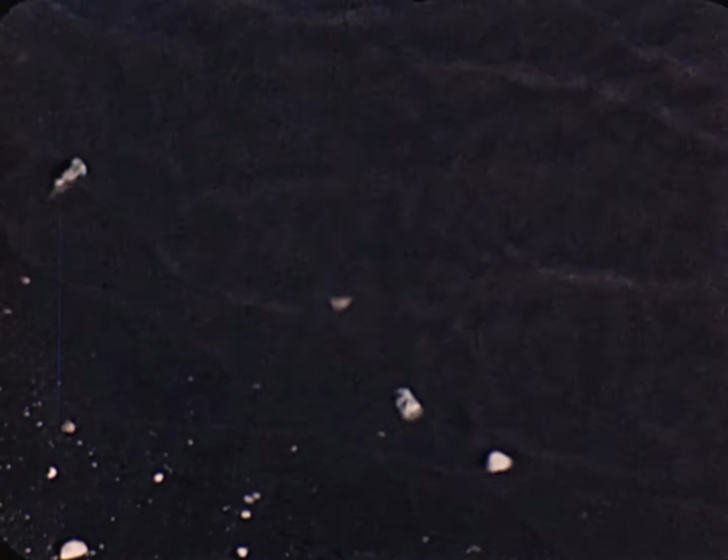In such restless waters as these, the Gulf of Mexico, lie the oil fields of tomorrow. Oil fields discovered and developed to meet the tremendous upsurge in demand for petroleum and all its many byproducts.

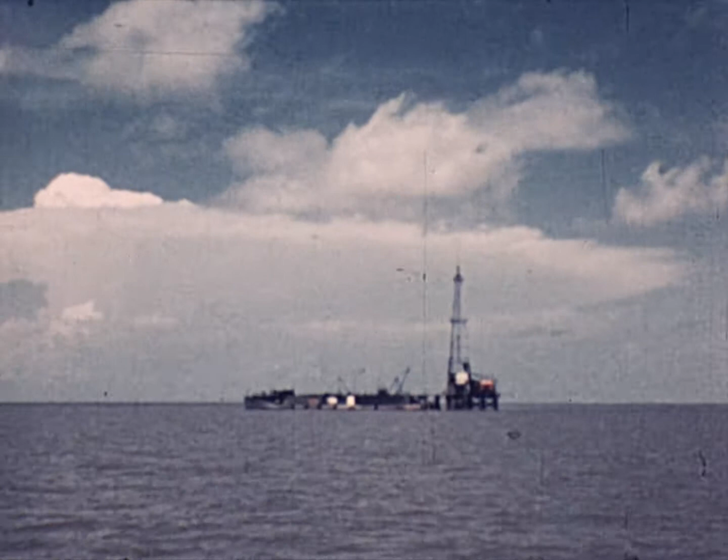This is a story of oil taken from under the sea, a saga of oilmen whose vision and courage mastered the barrier of ocean currents, waves and tides, of hurricanes and other relentless forces of a restless sea. Men of skill and determination, pressing their search for oil ever seaward. First 1 mile, then 5, 10, now 20 miles, and tomorrow who knows how far from shore.

This seaward search for oil had its beginning in the historic Evangeline country along the Bayou Teche, an area immortalized by the poet Longfellow in his idyllic tale of the Acadian people. An area transformed from a quiet pastoral community into an industrial center alive with new activity.

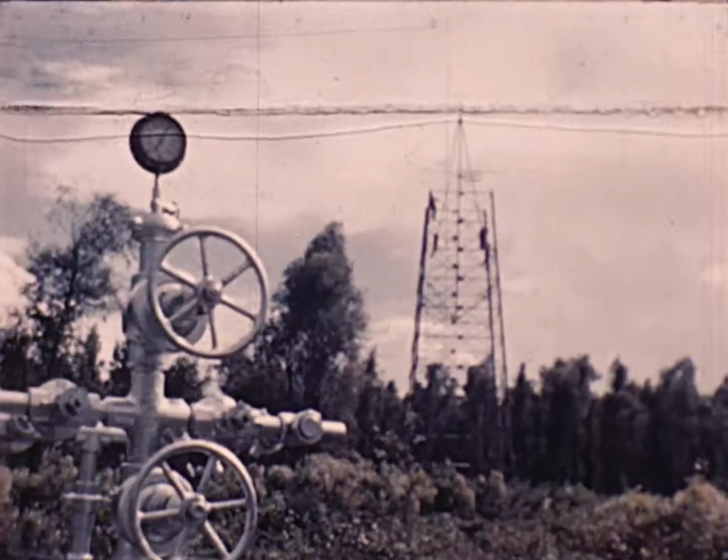It had been found that great mainland oil fields extended under the partly submerged marshes and shallow swamplands, under bays and quiet bayous, down to the ocean's edge. Should not these same conditions exist beyond the shore, throughout the continental shelf? Thus reasoned scientists of the petroleum industry, a logical theory whose proof was to involve new and complex problems.

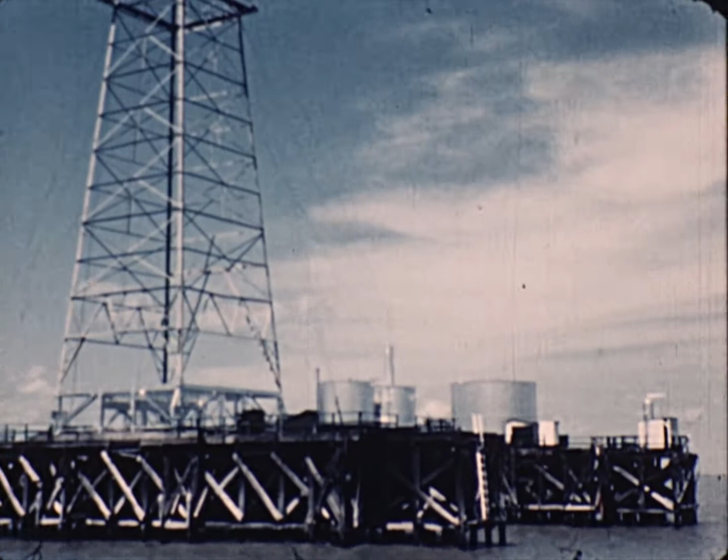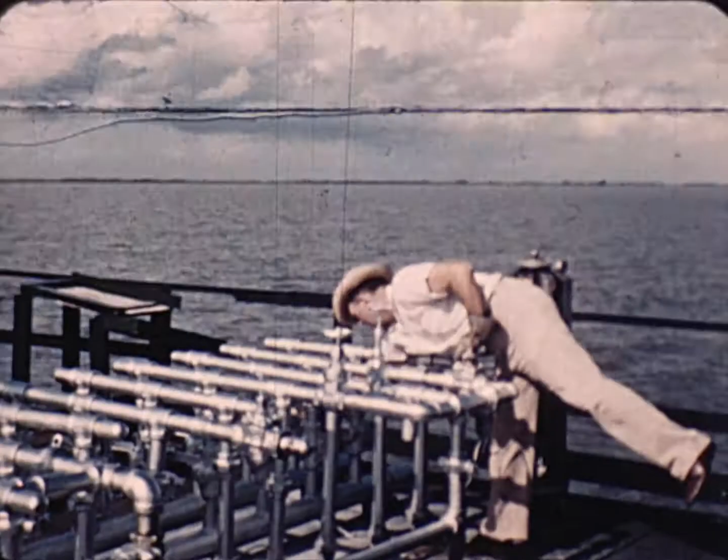The discovery at Creole resulted from seismograph work started on the mainland, continued and extended into the open sea. Here, through directional drilling, 10 wells were drilled from a single platform, and in the first 11 years of operation produced about 2.25 million barrels of oil.

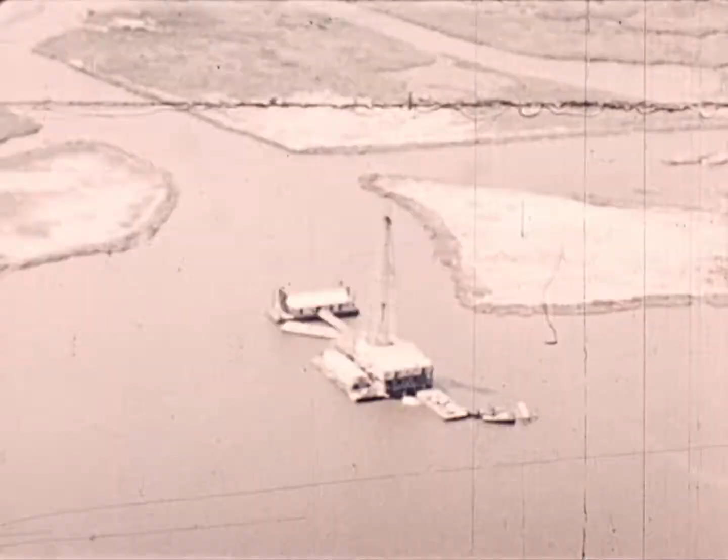Pressures of war delayed search and development in the tideland areas. Short steel supplies were concentrated on proven locations in older fields, where a barrel of certain oil was worth more than any speculative venture of greater possibilities.

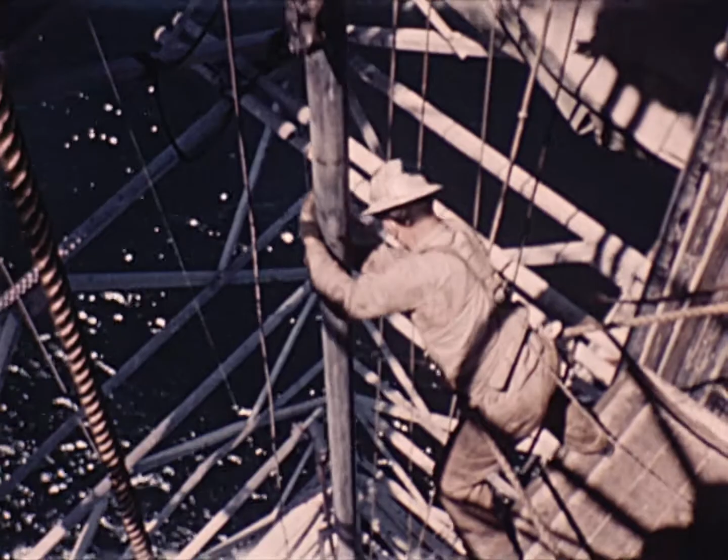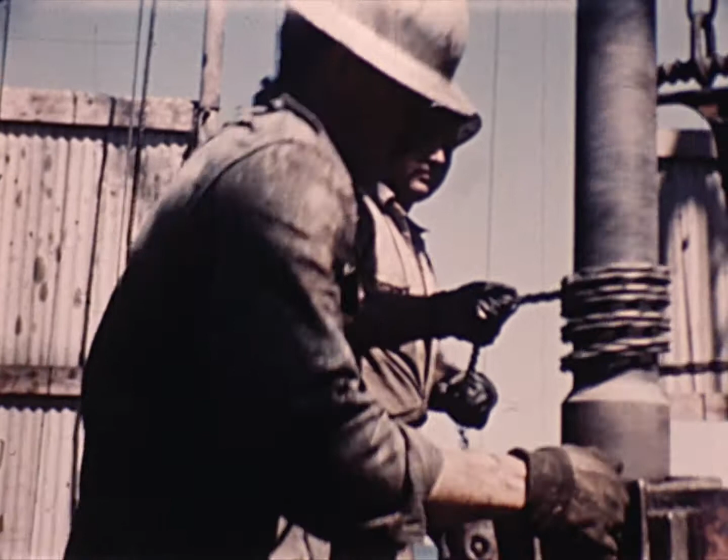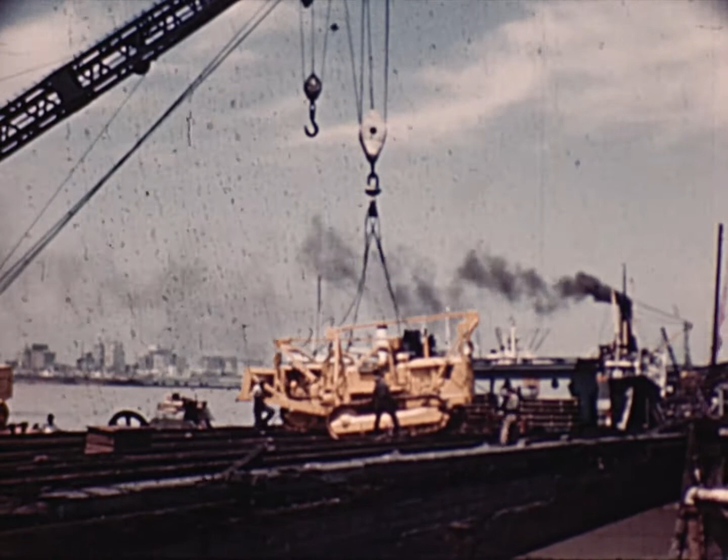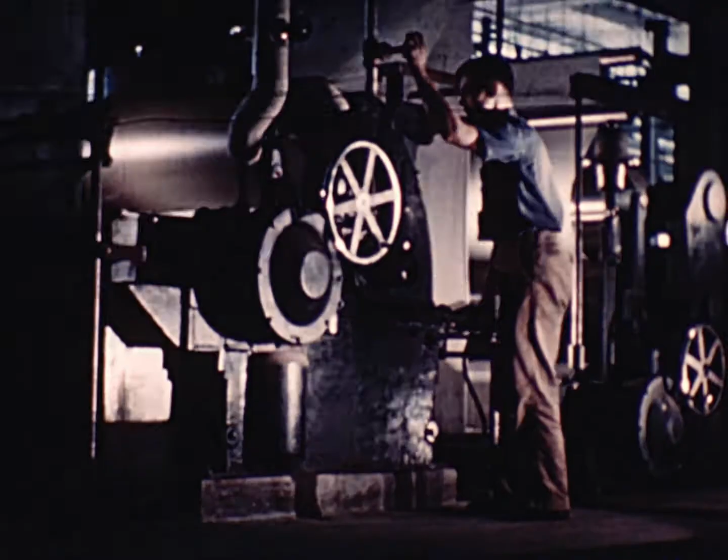The fantastic post-war increase in petroleum demand revitalized the search, forced the industry into an urgent, dynamic quest for new fields, new production, greater reserves. It was time to replenish the stock of America's greatest natural resource, to find the oil for our industry and commerce, to supply our vast transportation system, to heat our homes and offices, to build a stockpile for any future emergency, to find the oil to meet a domestic demand in excess of 6 million barrels a day, to block out the reserves to support this economy moving on heavy wheels, borne on silver wings, to power and lubricate the grinding gears of industry.

Spurred by these many factors, executives like these, Robert S. Kerr, United States Senator from Oklahoma and president of Kerr-McGee Oil Industries, Incorporated, and Dean A. McGee, executive vice president, turned their attention to the task.

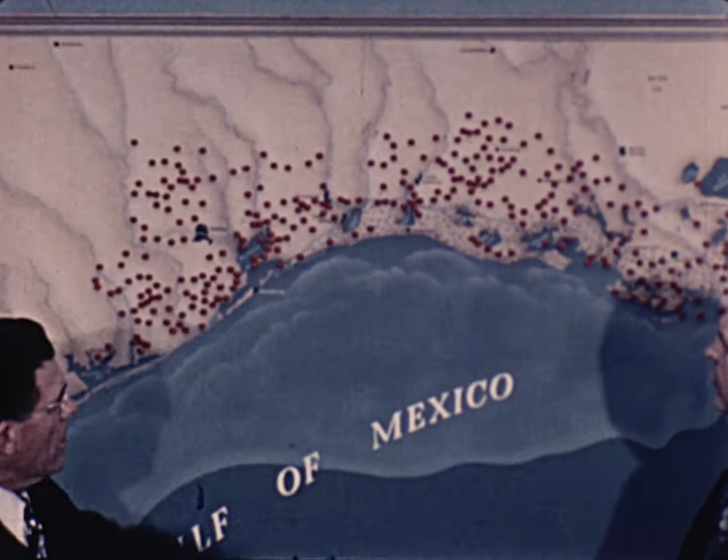Here, they reasoned, was a potential oil country of 51,000 square miles, an unexplored petroleum province under the sea. Here, hidden beneath fog, rain, and restless ocean waters, the continental shelf extended seaward to water depths of 600 feet, and, so far as scientists were able to determine, contained subsurface formations that would be favorable to the bountiful production of oil.

Here, undoubtedly, were salt domes, exactly like those protruding upward through sedimentary rocks along the mainland. Salt dome structures similar to the hundreds producing oil in the proven fields fringing the Gulf of Mexico.

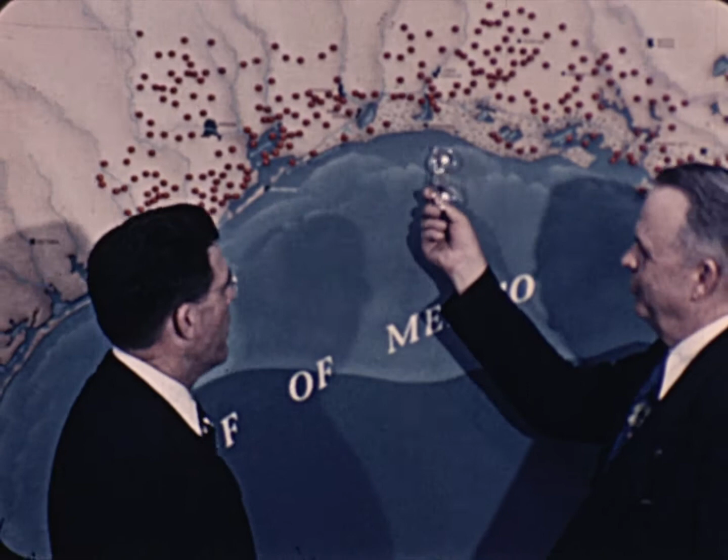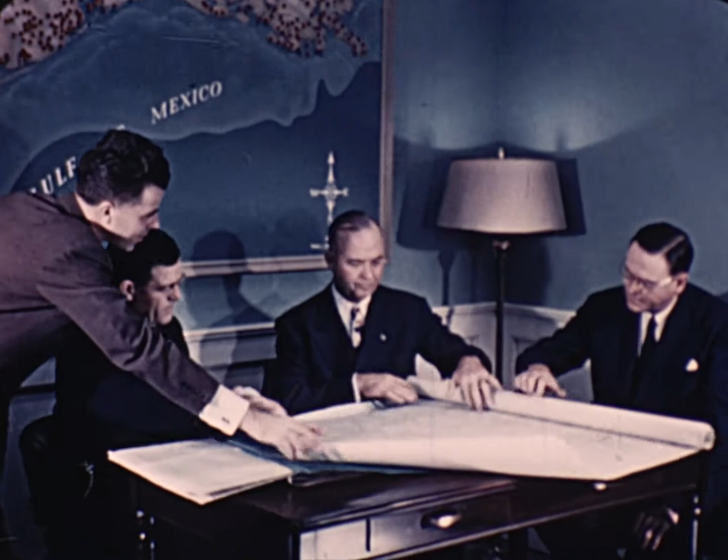Accepting this challenge from beneath the sea, an intense series of conferences got underway to determine costs, consider the hazards, to estimate the possibilities of success, not in terms of this year's bank balance, but over the long-range viewpoint. These problems exacted the utmost in vision, courage, and technical skill, calling to the full on the abilities of executives, engineers, geologists, drillers, to map the strategy for a great offshore venture.

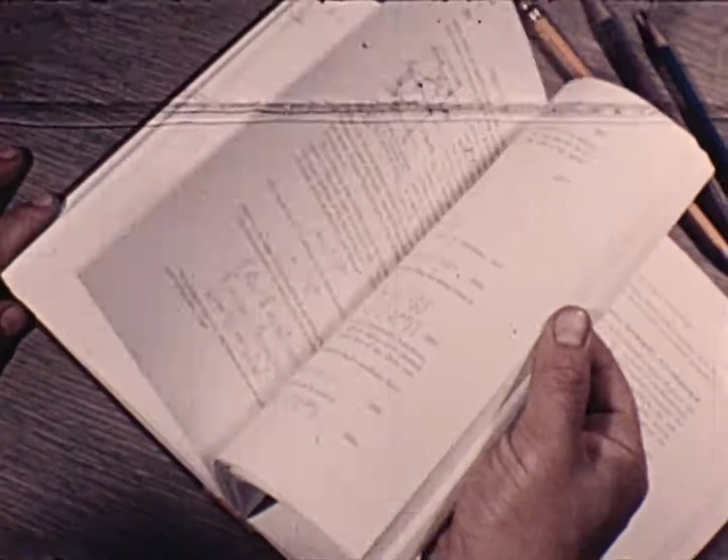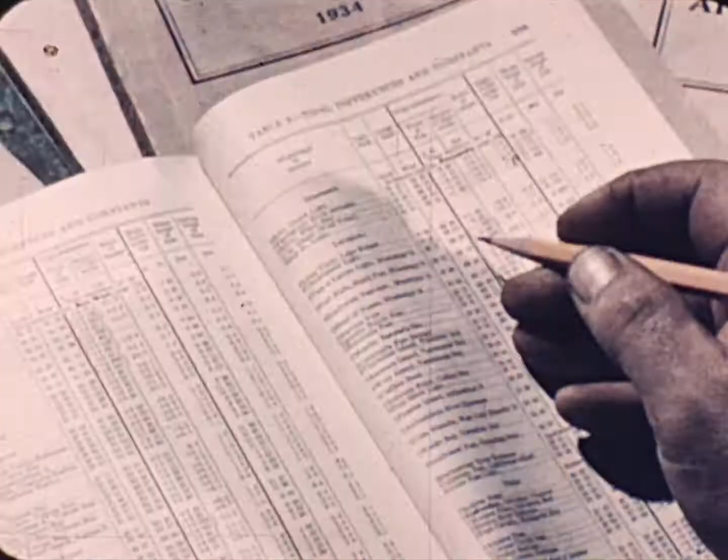Field men studied textbooks and reports to see how related problems had been handled by others. The records of Gulf tides and storms were combed to determine the requirements of structural design. Winds and currents, the minimum and maximum of water depth, all of these were studied.

Possible oil-bearing structures had to be located. For this purpose, new techniques in the science of seismology were developed.

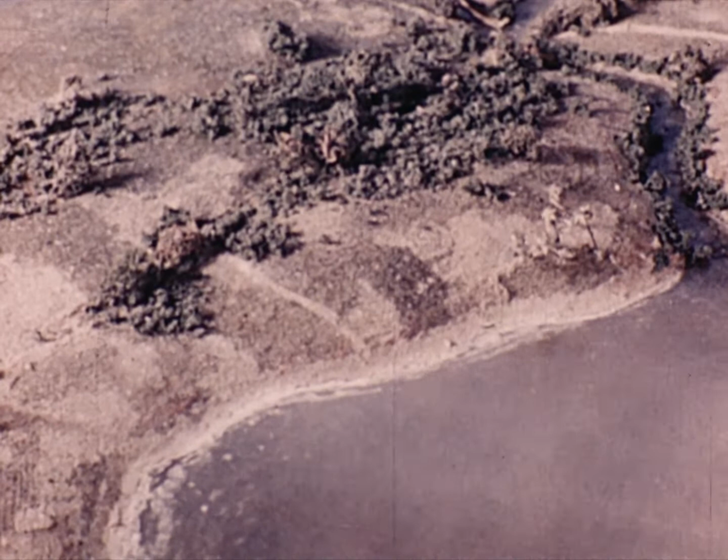One of these was the application of SHORAN, a wartime development of navigational radar, to determine the exact location of each shot point. At known U.S. Coast and Geodetic reference points ashore, two portable signal repeater stations are precisely positioned. A survey vessel can then compute electronically its exact distance from each station and, by triangulation, plot positions with pinpoint accuracy.

The shooting boat and its companion, the recording boat, are ingeniously equipped to record and measure reflected shock waves created by discharging dynamite about 5 feet below the water surface.

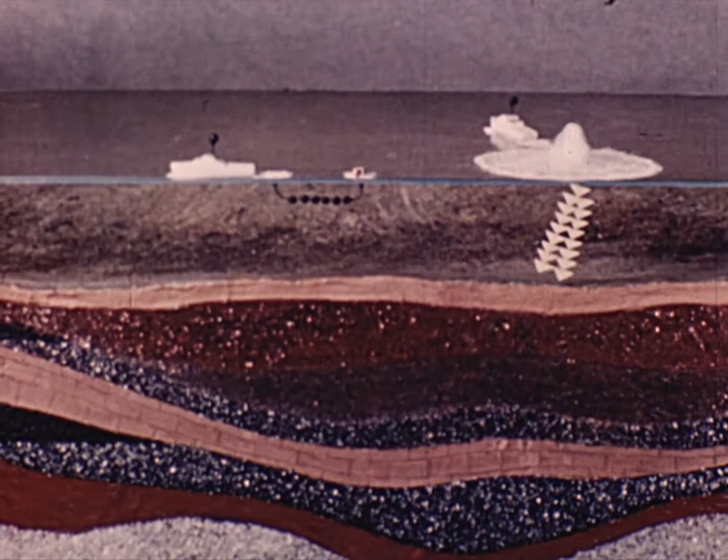These controlled explosions set energy waves in motion, which, when reflected by the various hard strata, are picked up by geophones strung out behind the recording boat. The varying impulses are then transmitted on waterproof cable to delicate recording instruments, and the photographic record interpreted to reveal structural conditions thousands of feet below the ocean bed.

The acquiring of leases followed preliminary geophysical exploration. Tideland areas are leased by the states concerned, Louisiana's in blocks of 5,000 acres. Prices are high, bidding spirited.

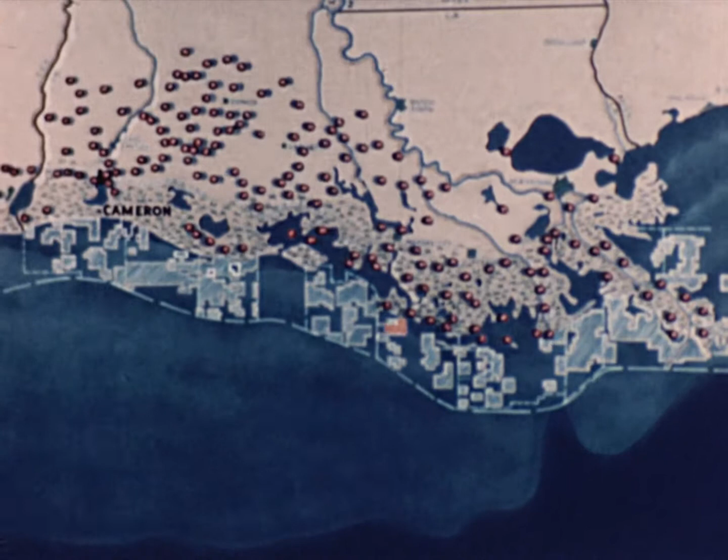Kerr-McGee and their associates took up thousands of acres in such leases. Their Cameron block, consisting of four 5,000 acre tracts, was purchased by sealed bid, an area of 20,000 acres for which a bonus of about $400,000 was paid the state of Louisiana, together with a royalty if oil is found.

The availability of marine equipment had to be explored. War surplus stockpiles were visited and inspected, all for the ultimate objective of designing the most adaptable, most economical and efficient unit for drilling at locations covered by 20 feet and more of open sea.

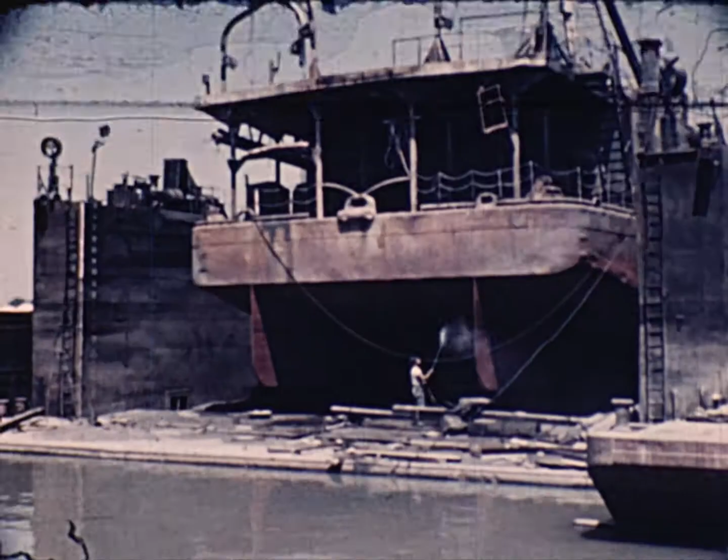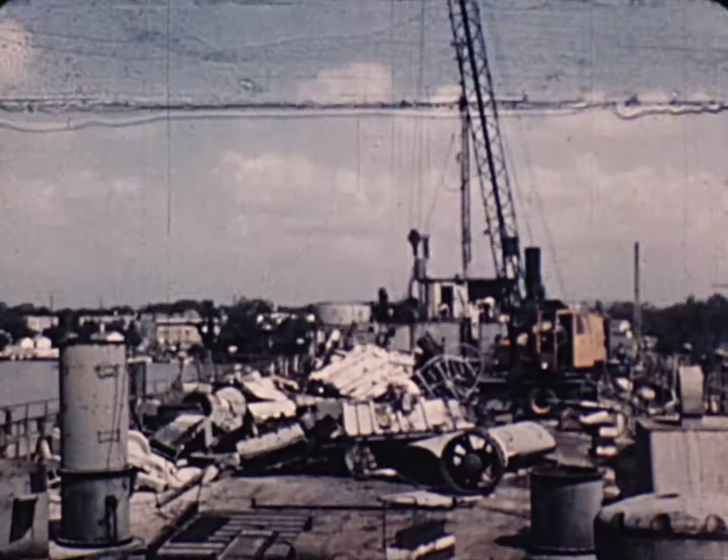Kerr-McGee acquired surplus boats suitable for adaptation to the specific job: Navy YF barges for conversion into drilling tenders, LCTs for transportation of heavy material, and air-sea rescue boats for movement of personnel and lightweight supplies. Vessels which had each contributed to a great military victory were once again pressed into service. Battle scars removed and converted to meet new requirements, they were prepared for another great task, the search for oil, the strengthening of a peaceful world economy.

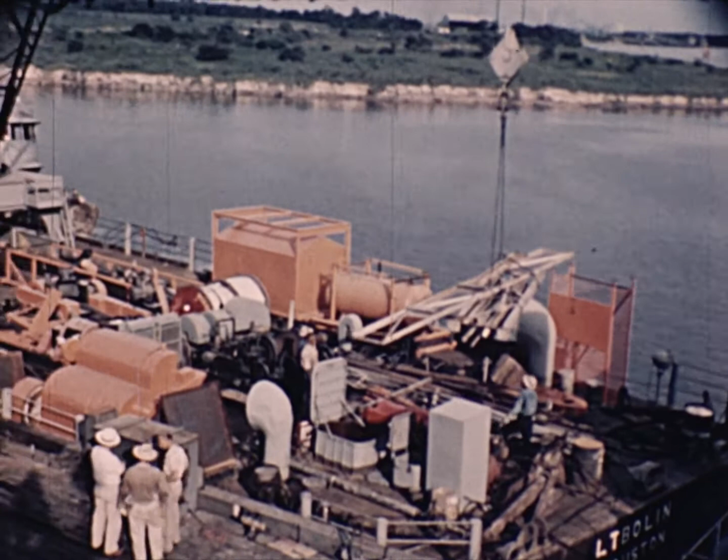At the same time, there began a gathering together of drilling equipment, specialized tools and machinery of proven ability for a new venture far at sea. From every corner of the country came necessities, all the multitude of pumps and tanks, of engines and drill pipe, all the varied component parts to fulfill the specifications of skilled engineers, to construct a completely self-contained drilling unit 41 miles from the nearest land base in the open waters of the Gulf of Mexico.

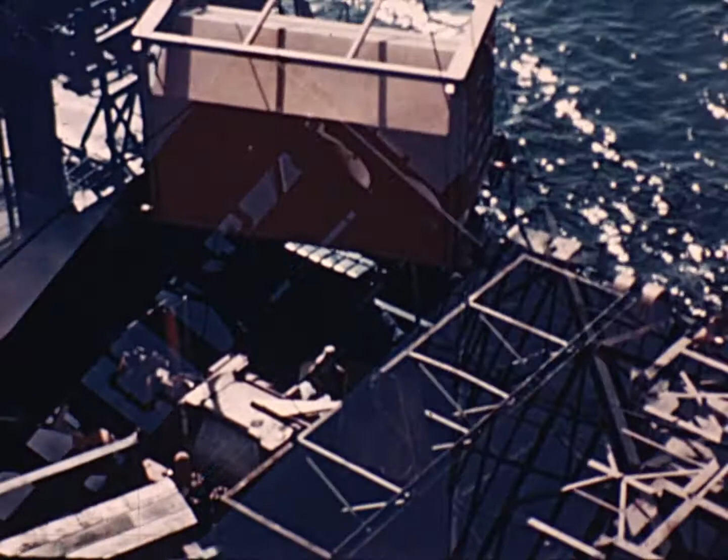A unit designed for the conquest of new fields, the kingdom of Father Neptune. A result of months of research, a tremendous investment, and the utmost in engineering ability. A culmination of vision transformed to practice, of concept to final design. A materialization of careful planning coupled with efficient teamwork.

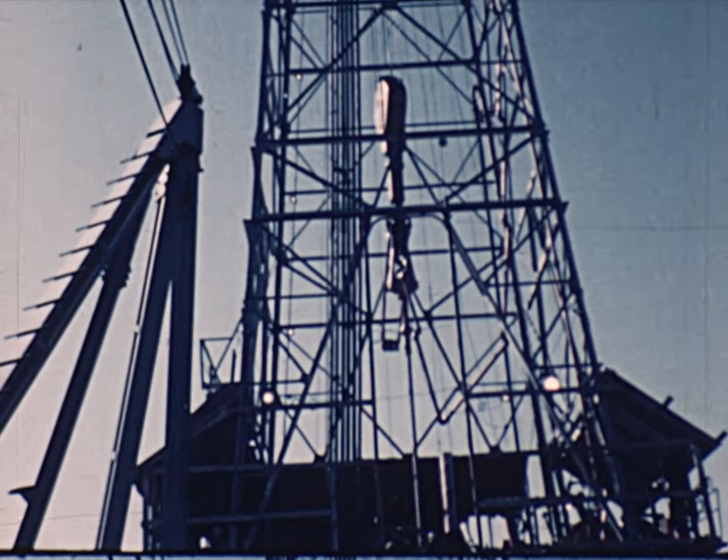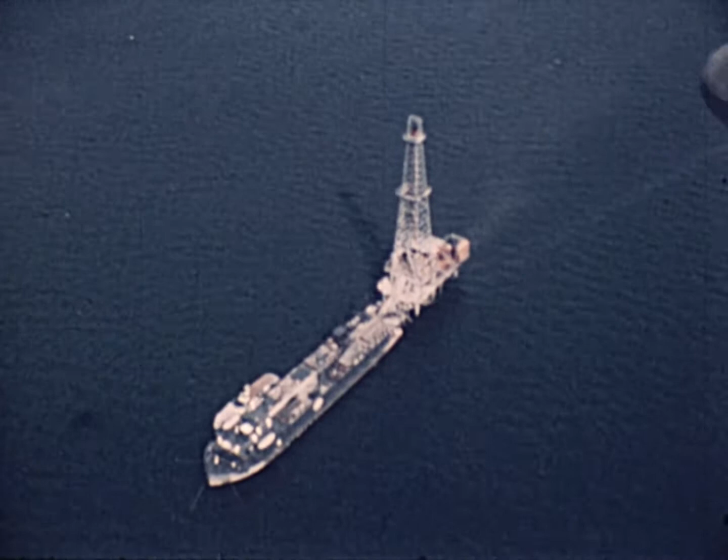This drilling operation far from shore, this extension of the search for oil, requires on-the-spot logistic support. The drilling tender, originally designed as an advanced base supply vessel with a cargo capacity of 2,300 tons, was converted for this purpose at a cost of more than $300,000. With an overall length of 260 feet and a beam of 48 feet, it is ingeniously employed as a headquarters, hotel, and floating warehouse for the storing of drilling supplies and provisions for day-to-day use.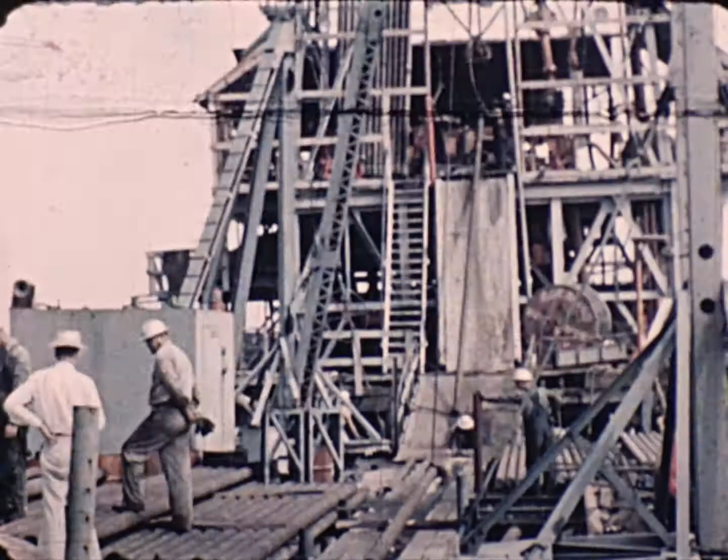Because of the distance from land, 2 complete drilling crews are maintained aboard the barge at all times. On a continuous operation, each crew works 12 hours a day for 7 days and is then relieved for a week ashore. Some of these returning crewmen travel as much as 500 miles from their homes, but on the job, they also find many of their accustomed comforts.

Pleasant bunk rooms and comfortable beds are well appreciated after 12 hours of strenuous, demanding work. Of equal importance to the crew members is the pleasure of a well-equipped recreation room.

Chow call promises heavily laden tables piled high with meats, vegetables, and desserts. The chef gets his day's provisions from well-filled shelves. At least a week's supply is kept on hand at all times. From the frozen food locker, he gets steaks, pork chops, chicken, enough to satisfy seemingly insatiable appetites. For an energy-consuming job fanned by a salt breeze, it really makes a man want to eat.

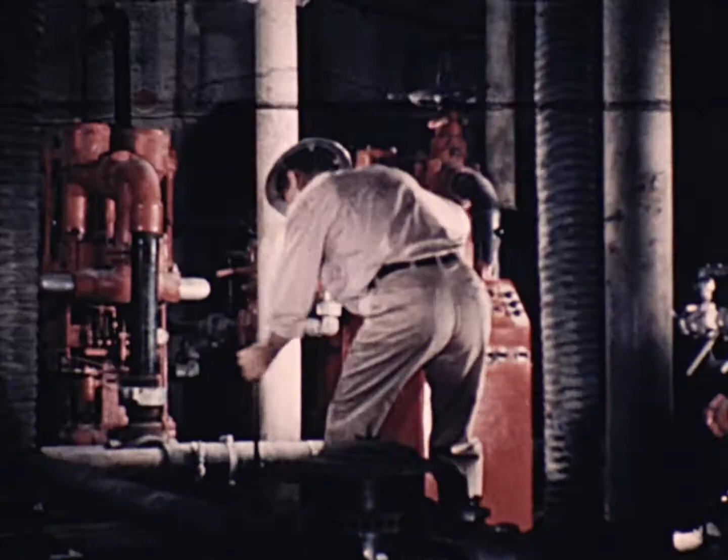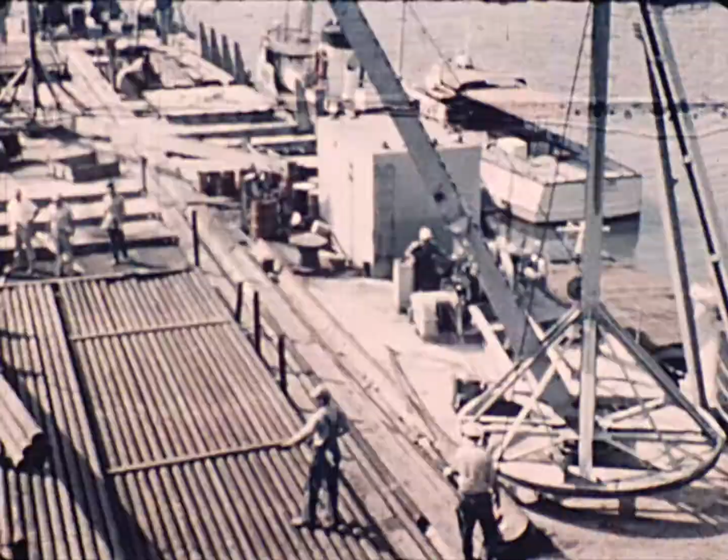Heart of the operation, the barge is a beehive of activity. Located on the lower deck are the electric generators, skid-mounted cementing pumps, mud pits, mud pumps, dry mud storage, and chemical supplies. Atop the upper deck are the pipe racks, electric logging equipment, spare drill bits, a full complement of auxiliary tools, and cranes to facilitate offloading of supply barges, to move the heavy equipment and materials needed in deep hole drilling operations.

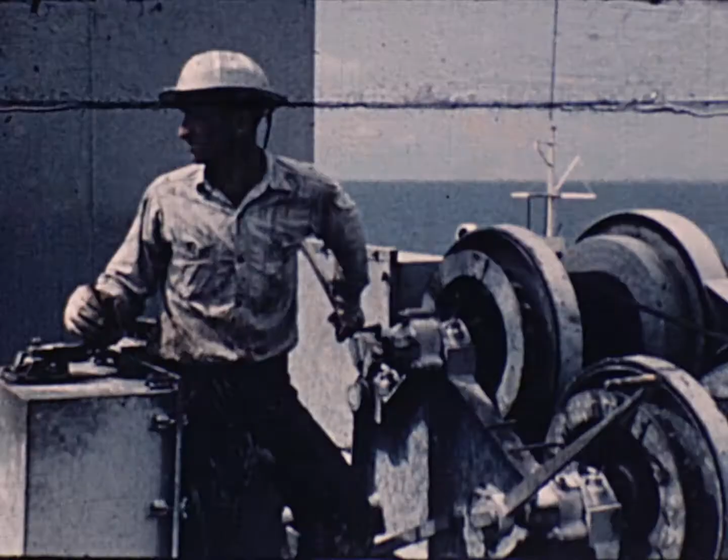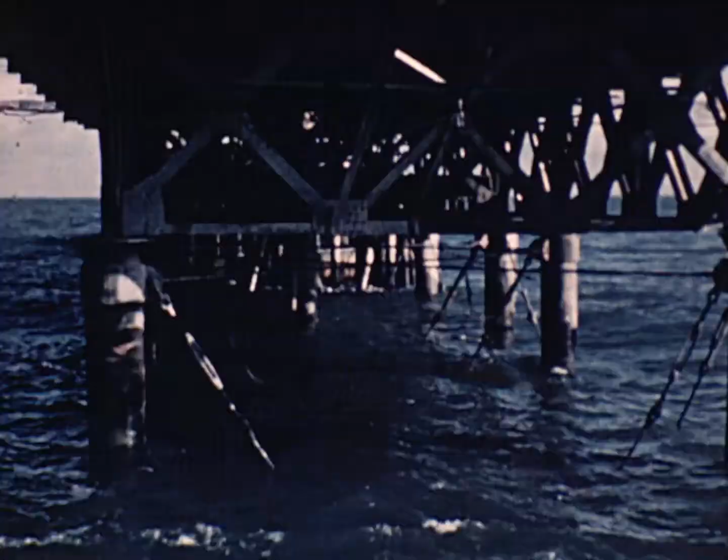Equipment of great strength and durability is essential in all marine activity. The drilling structure, brawn of the operation, is erected upon a relatively small, rigid platform supported by 8 30-inch steel piles driven deep into the ocean bed. The main deck or substructure is attached to and built around the piles.

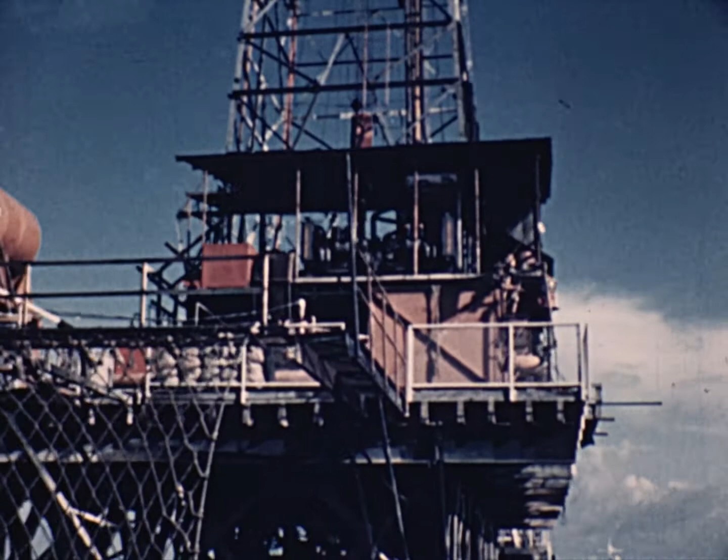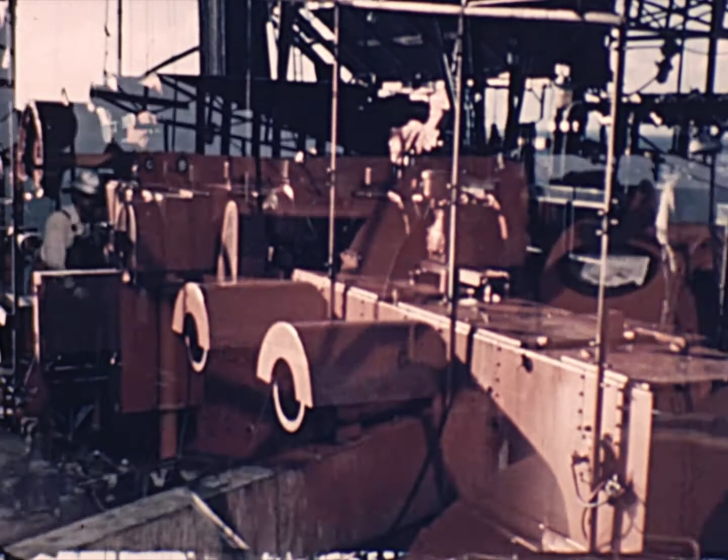Installed here are the drilling engines, mud pumps, mud tanks, and day tanks for water and fuel. A steel superstructure serves as the derrick footing and forms an upper deck or derrick floor, support for the big Ideco 1350 rig. The rig is powered by 3 GM diesel quads, 72 cylinders delivering 1,800 horsepower to operate the drawworks, rotary table, and mud pumps.

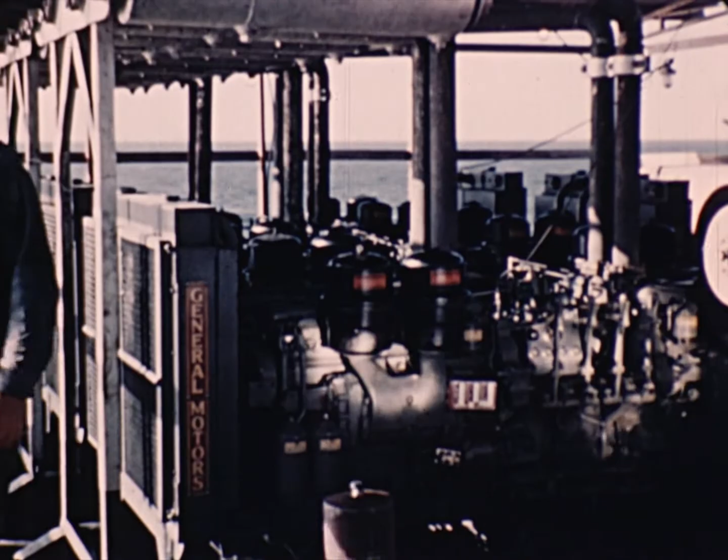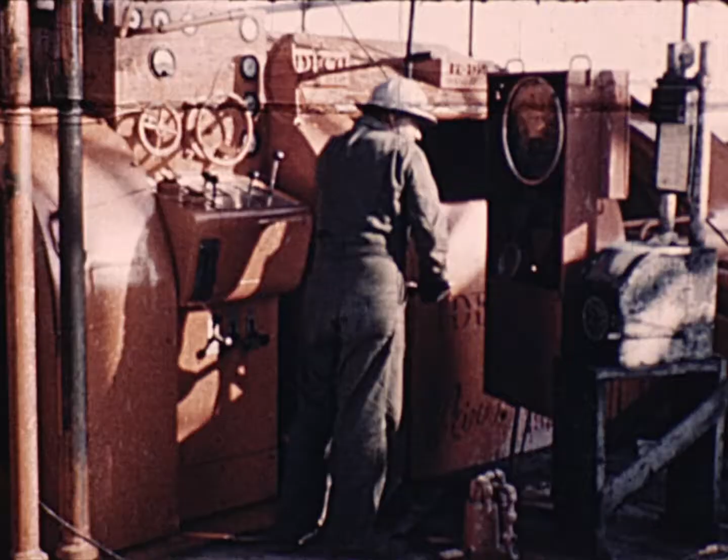Like a master at the console of a great organ, the driller controls this massive machine by manipulating air valves mounted on a central control panel. He watches gauges and meters, knows exactly the weight on the drilling bit. Power distributed by the compound unit is delivered through a transmission to the hoist and rotary table in any one of 9 possible combinations of torque and speed.

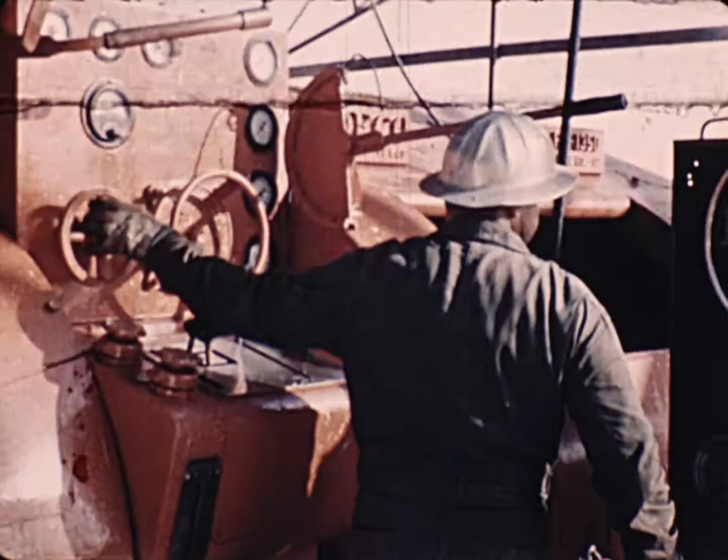Air-actuated clutches controlled by a single hand wheel at the driller's station determine the speed. Gears and bearings of the rotary table are thoroughly lubricated and are protected from mud by means of a sealed oil bath housing.

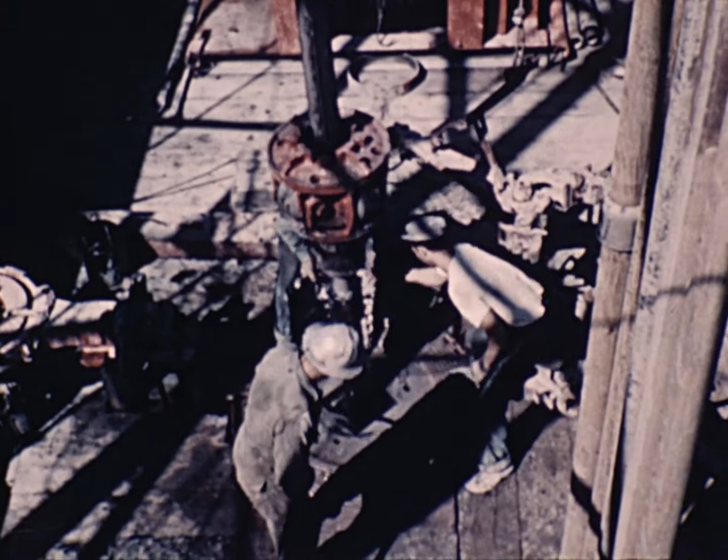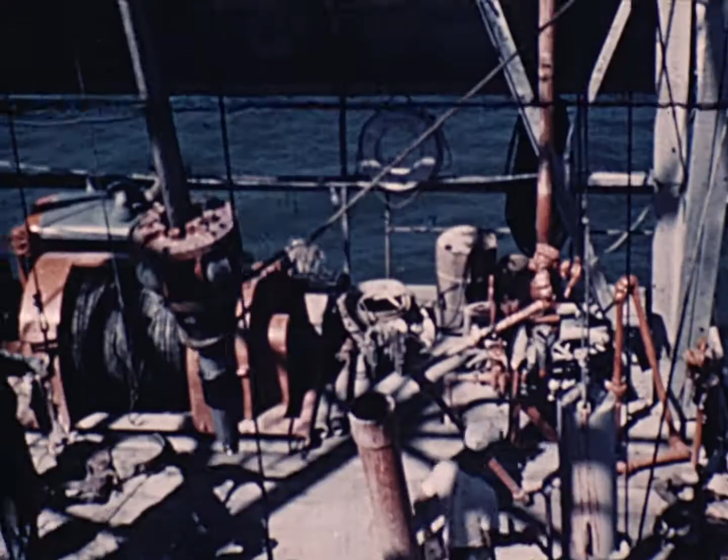As drilling progresses, the bit becomes worn and a new one must be substituted. All drill pipe must be pulled from the hole. First to come is the Kelly and swivel. Slips are placed in the hole. Heavy tongs are clamped on the Kelly, and the first joint is broken out. Roughnecks pull the Kelly to one side and lower it down the rat hole where it will be clear of action on the derrick floor.

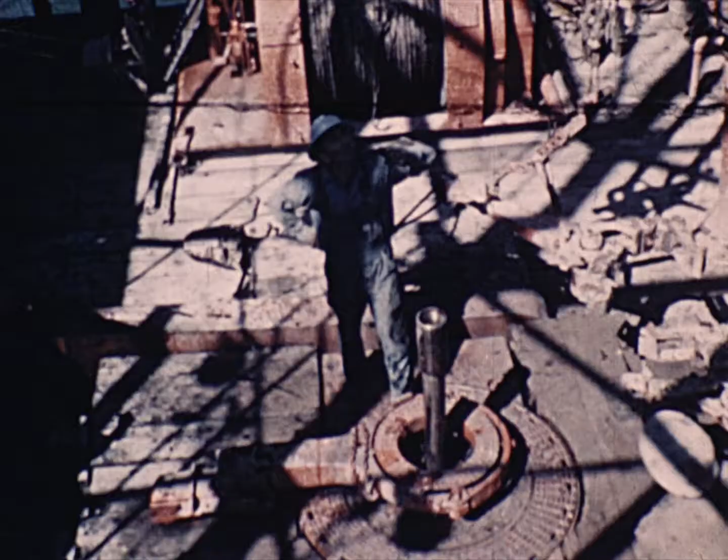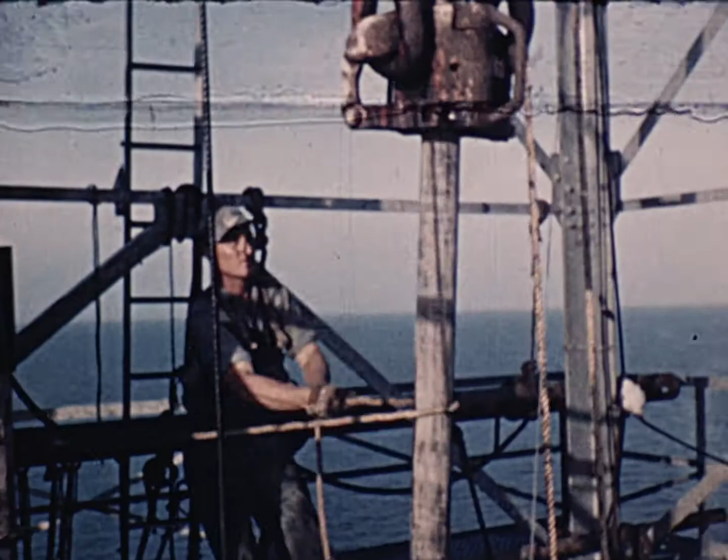The traveling block is lowered. Elevators latch around the first stand of pipe, and the driller picks it up with the drawworks. Breakout tongs are applied, the rotary is turned to unscrew the joint, and the pipe is racked in the derrick. High up on the racking platform, the derrick man releases the elevators and racks the pipe in place beside the other stands, and the block is lowered again for another stand of pipe.

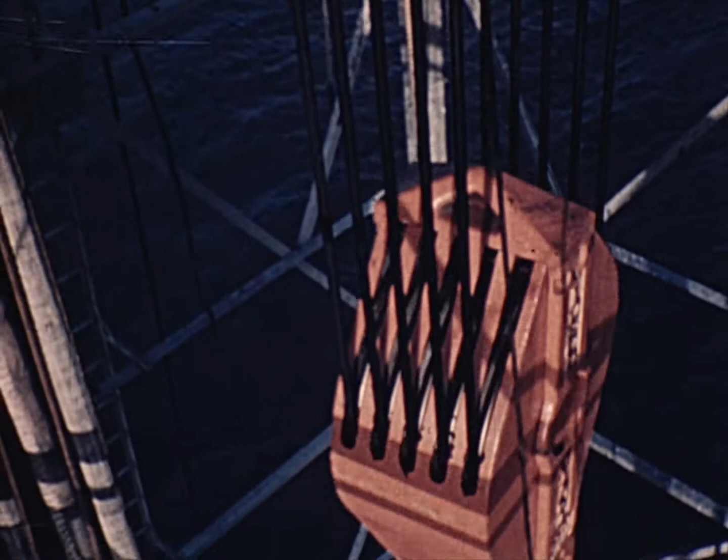Time and again, the operation is repeated until the last joint is lifted.

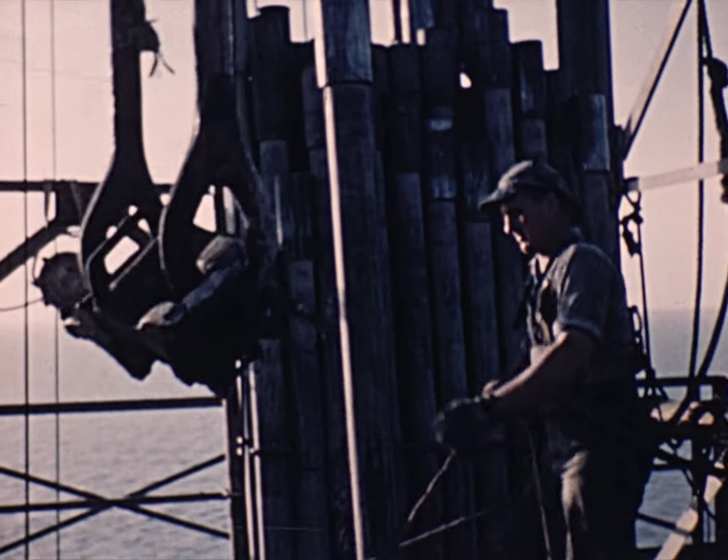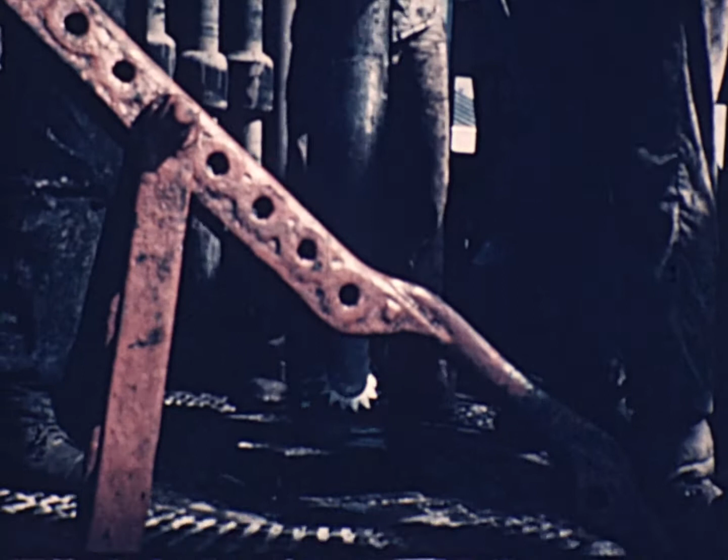A worn-out bit is removed and replaced with a new one. Now all the pipe goes back into the hole, and drilling is resumed.

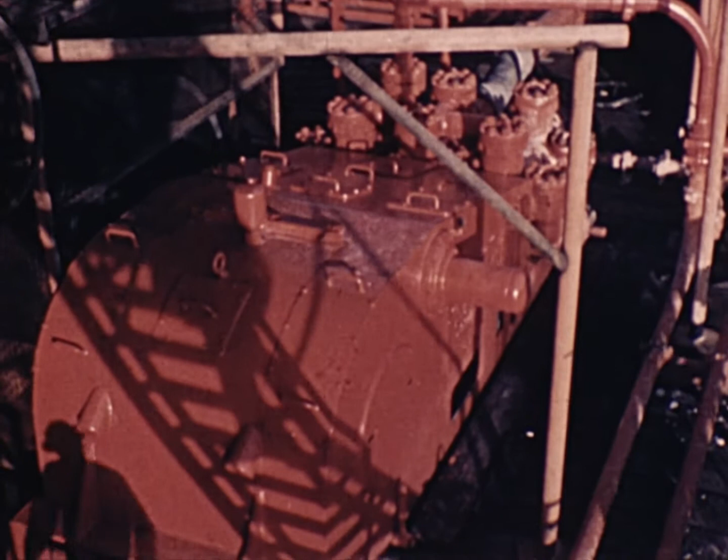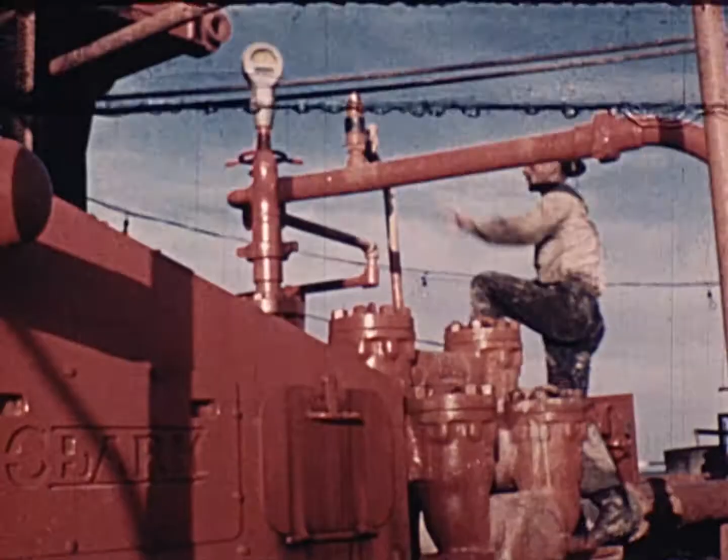A most important factor in the drilling of offshore wells is that large volumes of fluid must be constantly circulated under high pressure. The mud pumps do the job. The Clark Ideco T880 triplex pump delivers more than 1,000 gallons per minute at 1,220 pounds pressure. Triplex action smooths out pumping impulses, maintains two-thirds less variation in discharge pressure than duplex action, makes it easier on prime movers, and lessens shock and wear on the entire system.

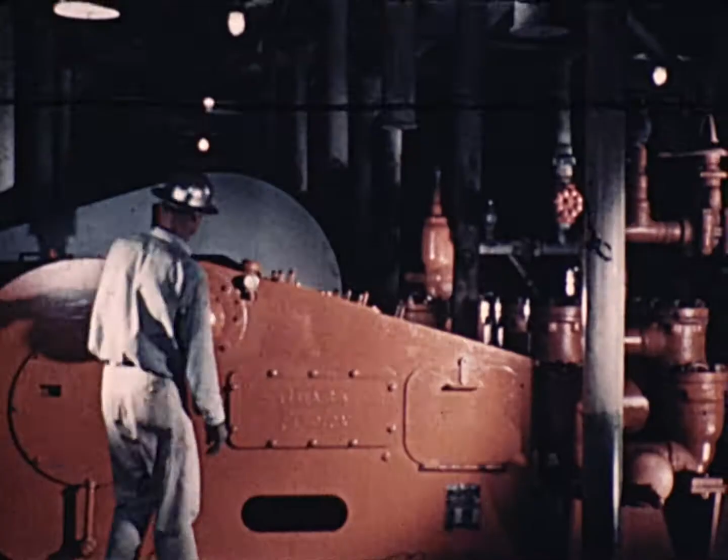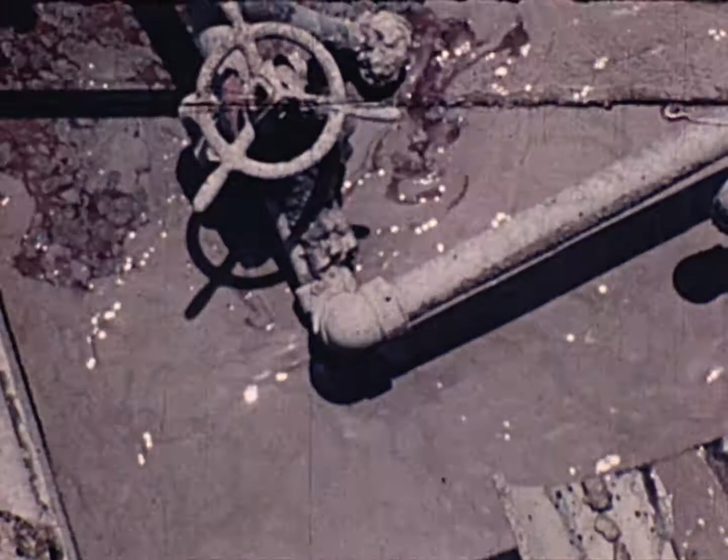On the barge, another pump mixes the mud and transfers it from the mixing pits to the slush pits. This mud, constantly circulating inside and around the hollow drill pipe, must be of controlled density. The weight of the mud counteracts tremendous underground pressures. It brings the cuttings from the bottom of the hole to the surface, washes and cools the bit. To keep it in good condition, the mud is constantly checked by specially trained engineers. Carefully watched is the weight, viscosity, alkalinity, sand content, and water loss.

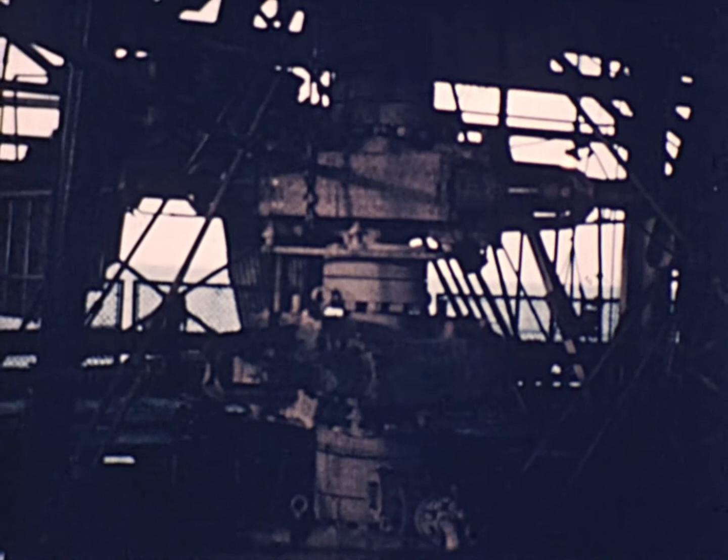In deep sea operations, elaborate safeguards are essential. Typical of these precautions is the use of multiple blowout preventers installed between the derrick floor and the lower deck of the drilling platform.

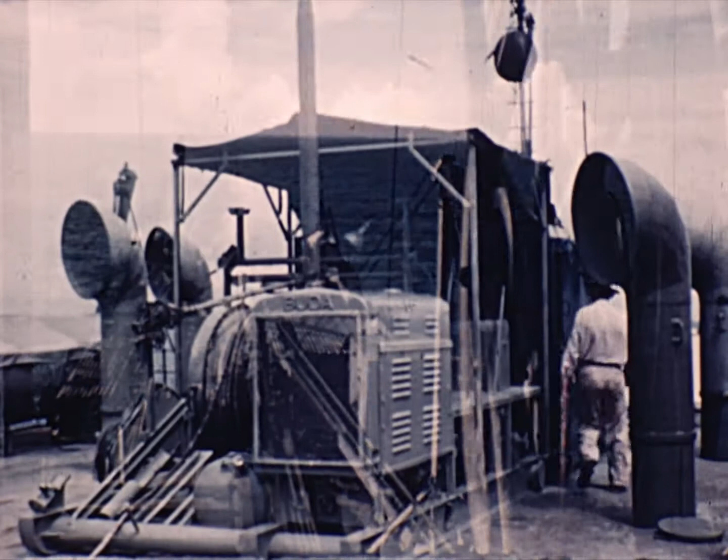As drilling progresses, every prospective zone is tested. Electric well logging devices give an accurate picture of the permeability and porosity of each new formation. There can be no guesswork. Operators must know the possible oil-bearing sands as they are drilled.

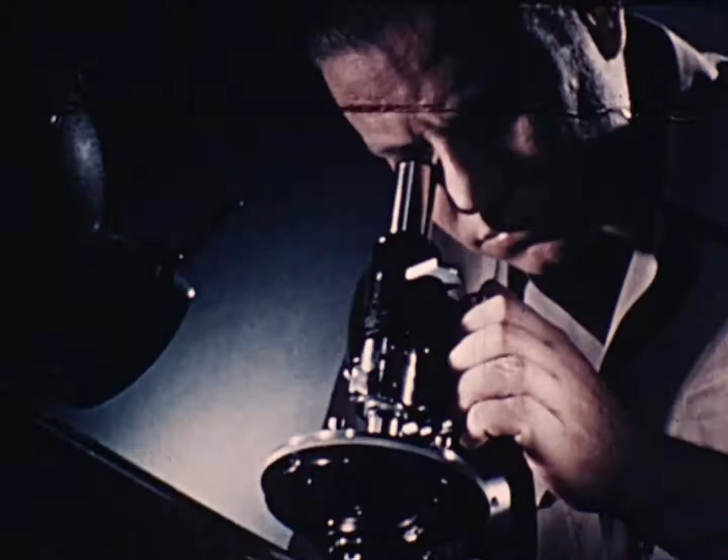Every likely formation will be cored and examined. Study of cuttings reveals the exact nature of the formation through which the bit is drilling, so the geologist knows exactly when a promising formation is reached.

When the oil-bearing formation is found, plans are made for the completion of the well. Casing is run to the bottom of the hole, cemented, and perforated. All is made ready to bring her in.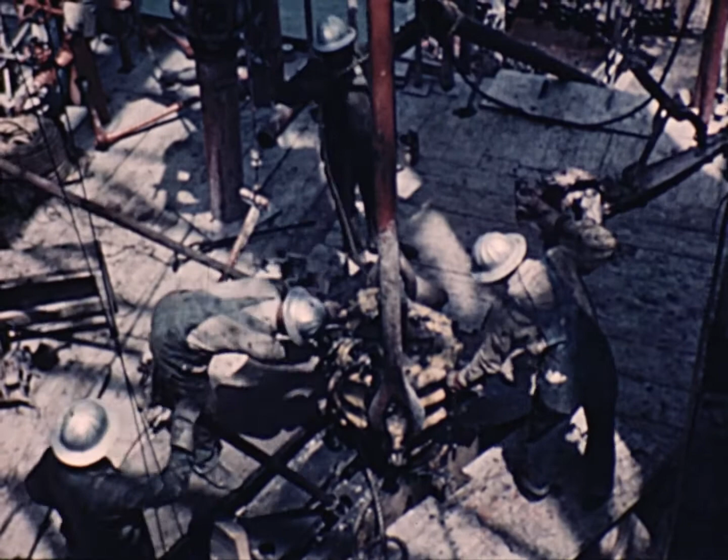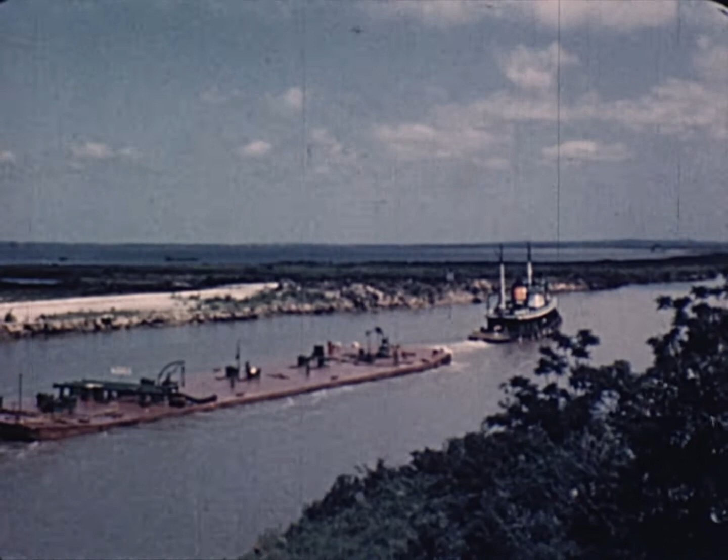The separator is set, the valves eagerly opened. Oil flows into the separator and, diverted through a flexible hose, goes directly into an oil barge for transportation to shore. Across the open expanse of ocean, up through winding bays and bayous, new oil moves to market.

The first well completed, operators turn their attention to another, drilled from the same platform by means of directional drilling technique. At predetermined depths, special bits are employed, designed by Security especially for the job.

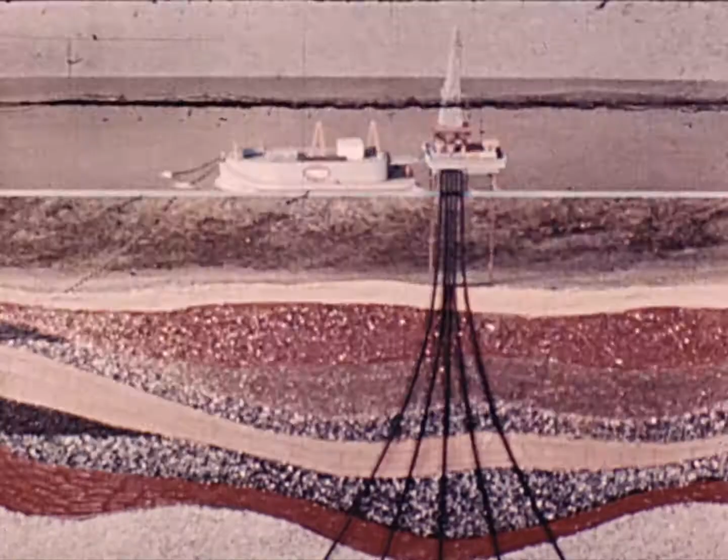For the first few hundred feet, the holes are practically vertical. Then they are slanted as desired, to the east, west, north, or south. Four, eight, twelve, possibly sixteen holes from the same platform, all completed at spots accurately and precisely determined before drilling starts.

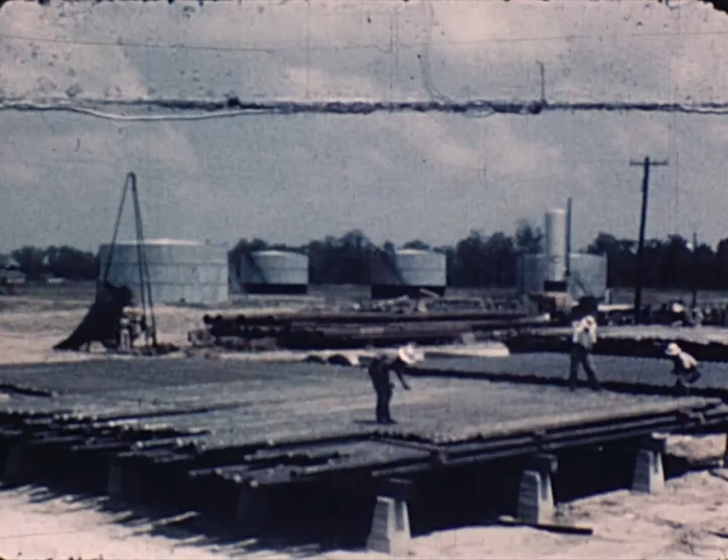To service this giant undertaking, a substantial land base is required, and at Morgan City, Louisiana, Kerr-McGee maintains its division headquarters. Here are located the field offices, supply yards, and the storage tanks to accumulate oil awaiting movement to refineries.

A large fleet is essential in marine drilling, an average of six boats of various sizes and types being necessary for each active operation. At least three barges must be added to the marine fleet for each production operation: one loading, one in transit, and one discharging crude oil at the mainland base or refineries near the seacoast.

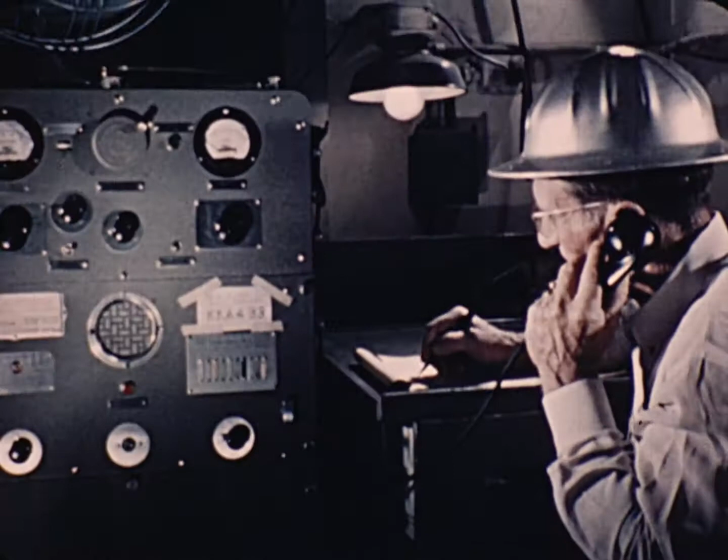A communication network must be maintained with the far-flung operations. Telephone lines are impractical, so shortwave radio is utilized. At the base headquarters, the master station is in constant contact with the drilling barges. Radio contact is maintained with the boats and barges plying back and forth through rivers, canals, and the open sea.

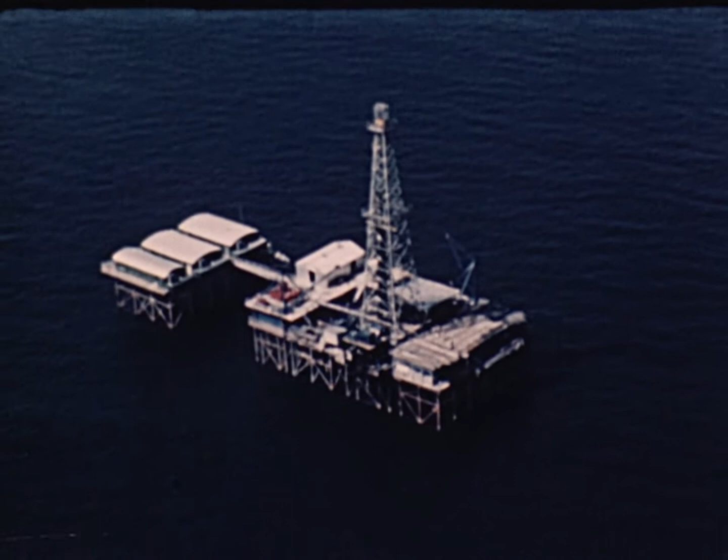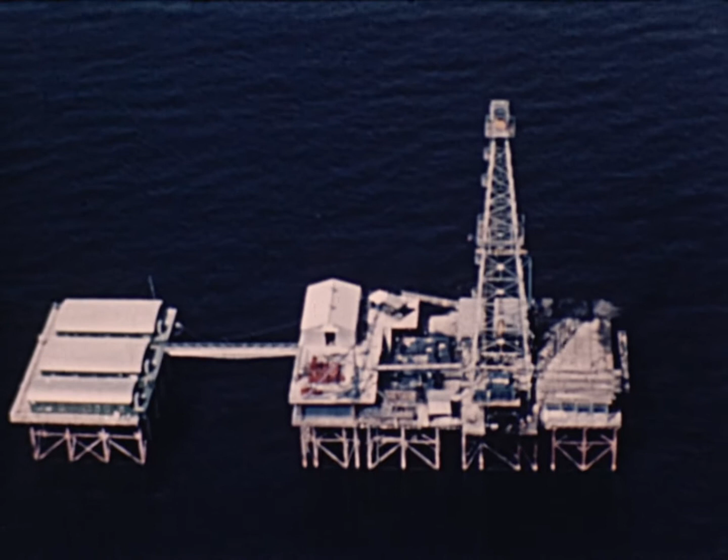Drilling in the Gulf of Mexico is undergoing constant change as new methods are evolved, tried, discarded, or utilized. Some companies use large, self-contained platforms costing upwards of one million dollars to build. On these platforms are located all drilling equipment, crew quarters, supplies, and storage.

Submergible drilling barges still are used in the very shallow water near shore. Drilling a well in the tidelands area is no small venture, sometimes more than one million dollars to complete one. Gulf storms, fog, and rough seas must be combated. They cause expensive delays during the platform construction period.

How far seaward will the ocean oil fields extend? Gravity data indicate salt domes 75 miles from land. At least 100 salt dome prospects have been mapped off the Louisiana-Texas coast, yet only a small part of the area has been surveyed.

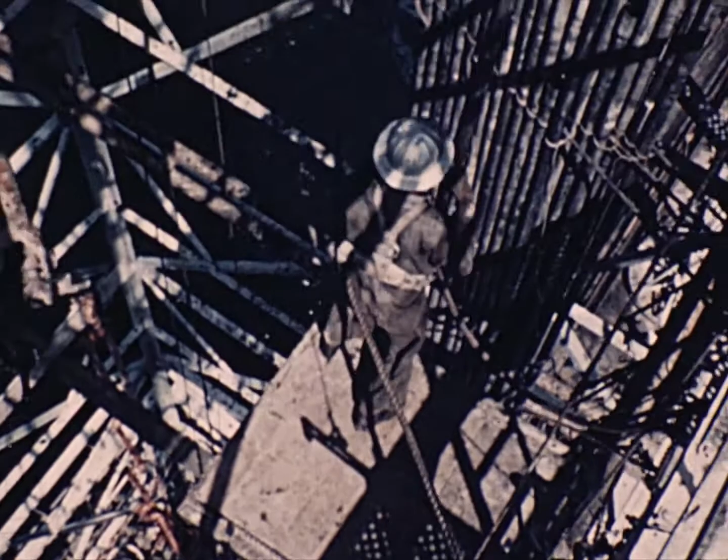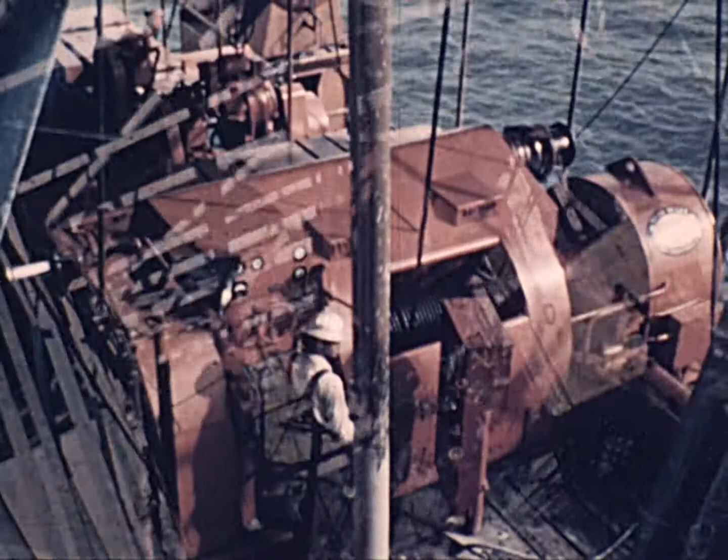Wells in the Gulf of Mexico have already been drilled to more than 14,000 feet. Men and tools, pioneering the development of America's new undersea oil fields. Already they have accomplished miracles. They have transposed theories of geology into proven reserves, actual oil of inestimable value to every American citizen.

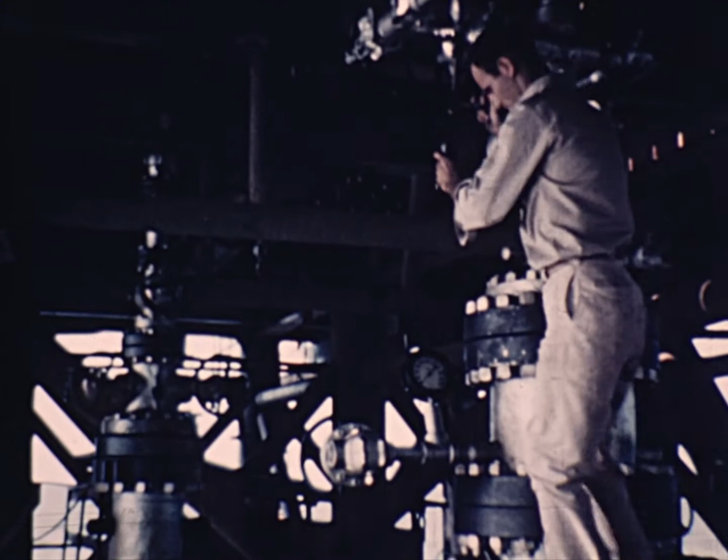Fulfilling its part in the progressive, competitive, and alert oil industry, Kerr-McGee explores for, drills, produces, and refines petroleum, helping to keep the lifeblood of industry flowing in unending supply, constantly developing new and better methods to build a greater tomorrow.

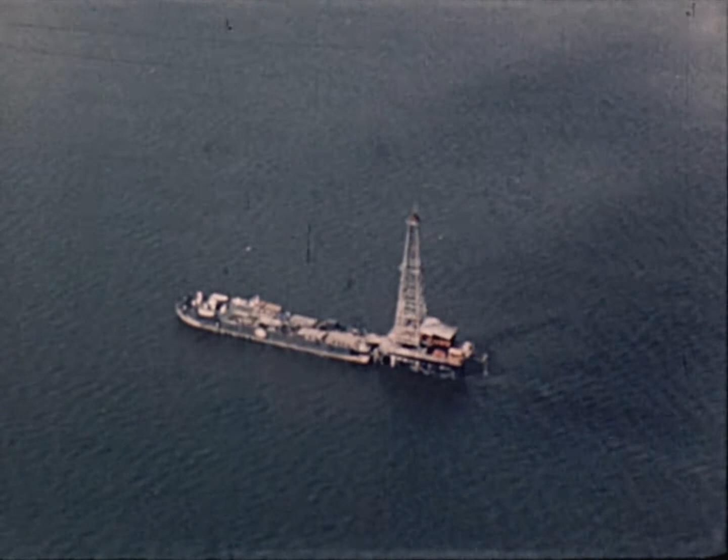From the snow-capped peaks of the Rocky Mountains, across the broad prairies of Kansas, Oklahoma, and Texas, the company's operations now extend far out into the waters of the Gulf of Mexico. Here lies a potential inventory of vital petroleum being made available to present and future generations by the men of vision, courage, and resourcefulness who explore Neptune's oil fields.